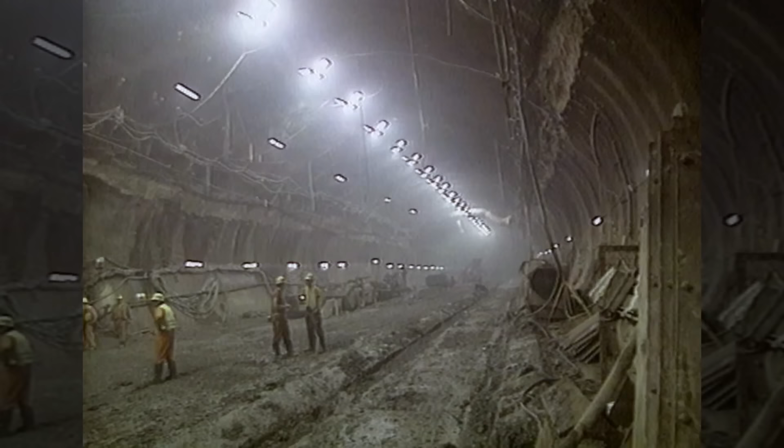Piercing entire mountains, digging a tunnel under the sea, feats of civil engineering which pulverize all records. 3 sites have revolutionized working underground. Like at the Mont-Cenis in the 19th century. Driving a tunnel right through a mountain massif whose rock is incredibly hard. It's never been done before, yet it's made possible by a brand new invention.

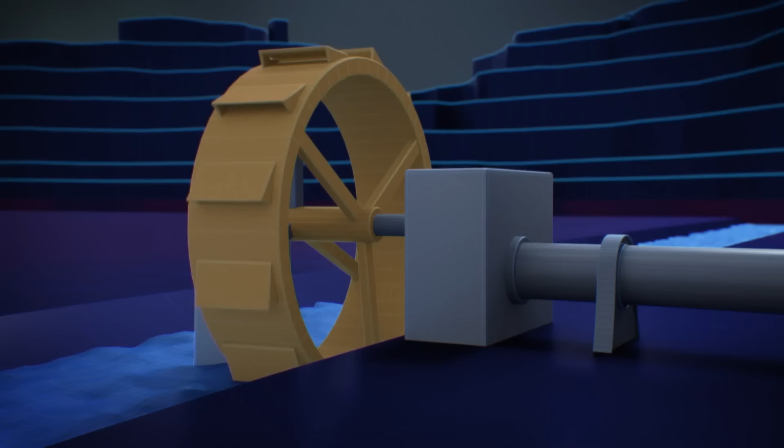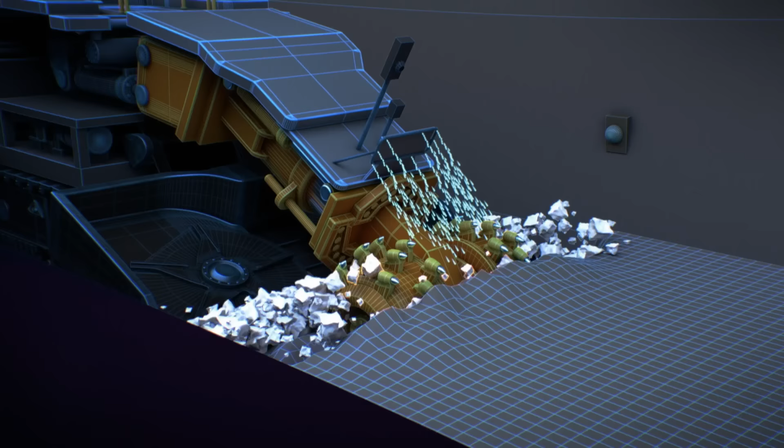An air-compressed drill, a kind of descendant of the pick hammer. Its performance is a quantum leap in drilling. However, 140 years on, the tunnel has to be enlarged, an altogether new challenge for the engineers. How can they keep the walls from collapsing? The answer is a machine that digs with centimeter precision. The laser checks the markers and tells the machine exactly how deep and how wide it has to dig.

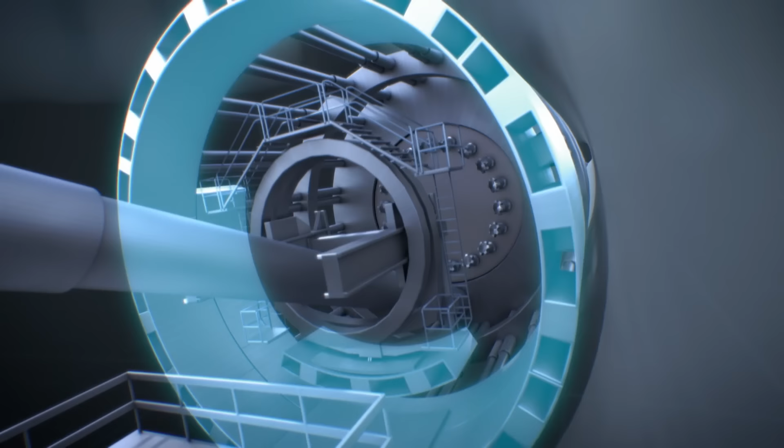Another feat long deemed impossible, a tunnel below the English Channel. It was the site of the century, like when 800 years ago they erected Notre Dame Cathedral. It seemed a huge gamble to dig only 40 meters below the seabed and yet avoid the risk of flooding the site. The solution is stunning. It's not just one tunnel, but 3. The result is a world first, the longest underwater tunnel on Earth.

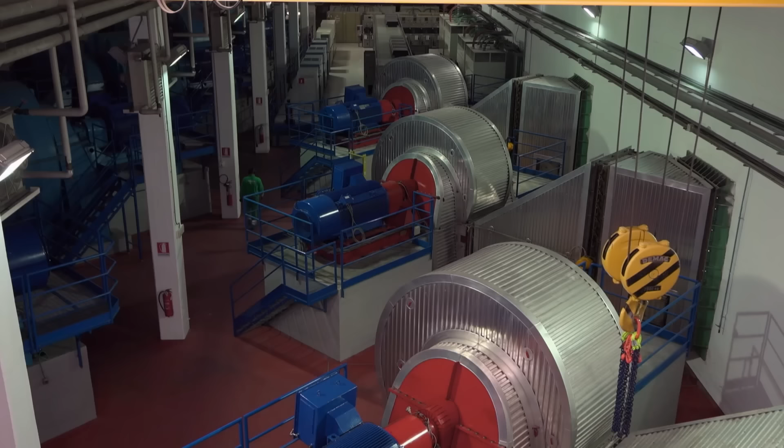A tunnel in the Alps holds another record. In 1965, the Mont Blanc Tunnel opens as the longest road tunnel in history. 50 years on, it also achieves the record of being the technically most advanced of its kind. There are about 4,000 sensors.

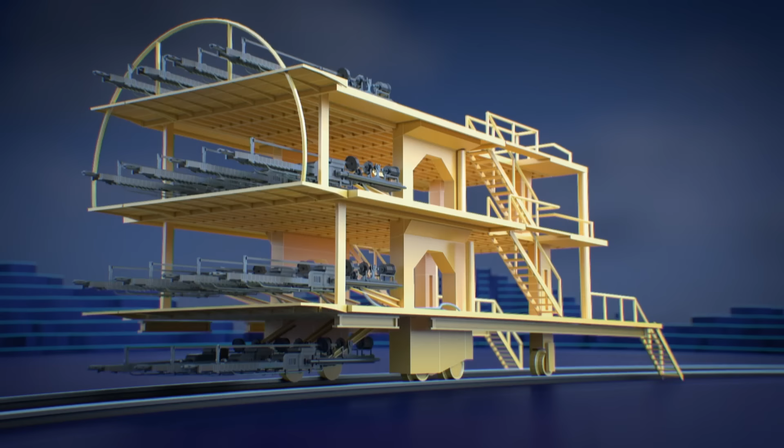How did the engineers rebuild a work more than 50 years old? What kind of machine was needed to replace entire sections of the tunnel? It was a colossal effort, unique in the world. The old slabs were cut out, carried outside, and then the new ones were put in place. 3 examples of high-end engineering with unequaled challenges at the most spectacular sites.

Be it oceans or mountains, we have always strived to overcome the obstacles nature has put in front of us. Tunnels have been among the first great achievements of our ancestors. There are galleries dug by miners 40,000 years BC. Be it Stone Age tunnels or the latest technological feats, there are hundreds of such sites the world over.

However, the most spectacular of all, which has been in the spotlight of the international media and accumulated all sorts of records, is the tunnel under the English Channel. In 1994, for the first time, the British and French meet without having to board a boat or an airplane. The American Society of Civil Engineers classified the Eurotunnel as one of the 7 wonders of the modern world.

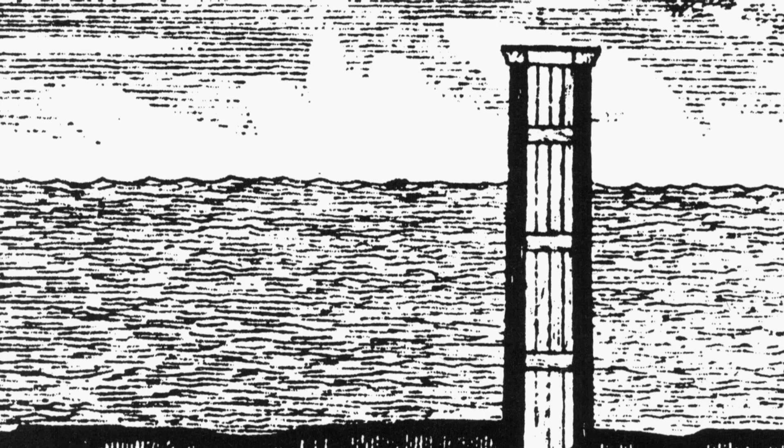To be able to get from shore to shore in 35 minutes was a dream conceived as early as 200 years ago. In 1801, a French engineer, Albert Mathieu Favier, imagines a tunnel with chimneys 80 meters high to allow for fresh air. An unrealistic proposal in view of a maritime zone with potentially tricky weather conditions. It takes until the end of the millennium before the project is considered feasible. In 1981, the governments of France and Britain give it the green light.

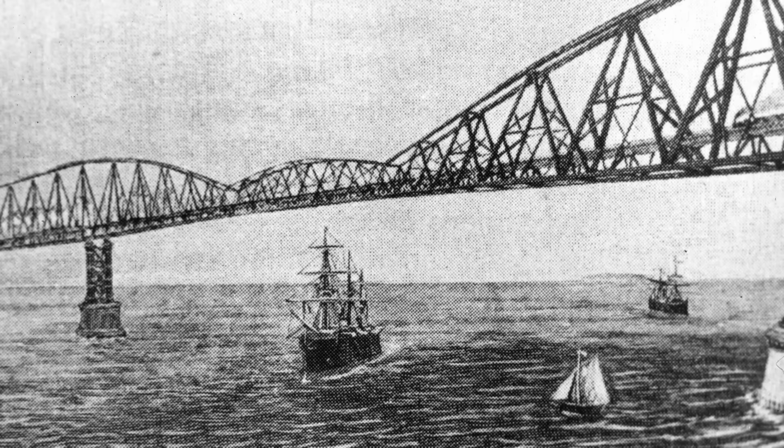4 proposals come under scrutiny. One is a gigantic bridge with hundreds of stays. Another option envisages a combination of tube and bridge. Yet both sides agree on the tunnel, a project of 15 billion euros. Work is to begin on December 15th, 1987.

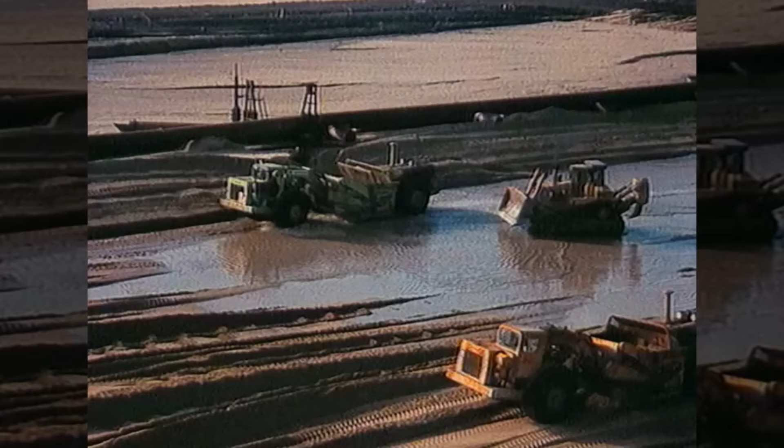Before the construction proper, they did test drills in the seabed to analyze the different geological layers. Samples brought up from several dozen meters indicate that there is a layer of rock at about 50 meters below the bed of the channel. Its characteristics are decisive for digging a tunnel. It's called chalk marl. It formed millions of years ago, when the dinosaurs still walked the earth.

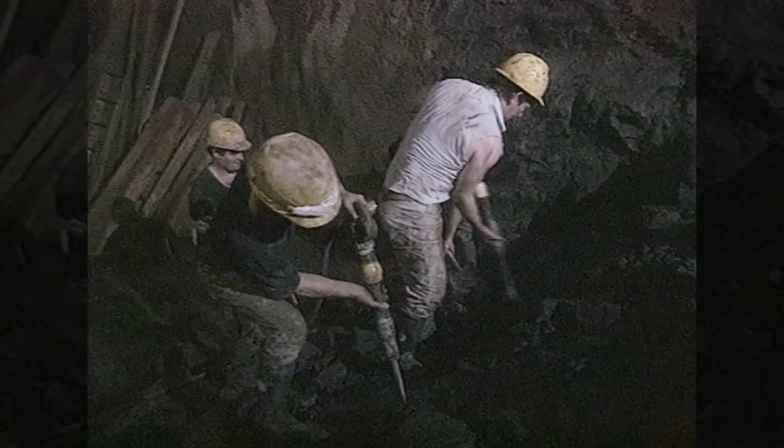It has two peculiarities. It's comparatively easy to dig, and it's impermeable. The trajectory of the tunnel therefore has to follow this layer, as right above it there's grey chalk, which is much less dense. While grey chalk consists of 10% clay, the proportion in chalk marl is 25%, so it's less porous. Yet, there is another danger.

If the miners dig too deep, they'll hit a layer of so-called gault clay. That's to be avoided at all costs. Gault clay is a bit muddy and very soft. If the rotary shield digger were to have sunk into that layer, the whole adventure would have ended right then and there. Thus, keeping exact track is paramount.

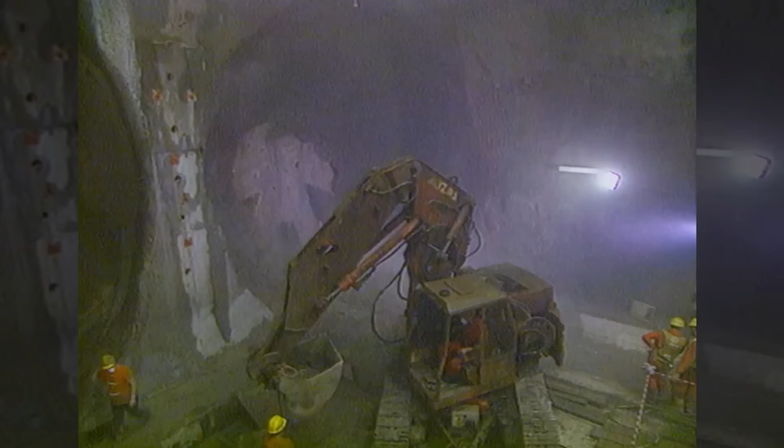The tunnel will run at an average depth of 50 meters under the seabed. If they get too close to the surface, millions of liters of water will rush in within minutes, meaning that the miners will have to follow the oscillations of the chalk marl layer. Digging under this premise poses no specific problem. Yet the ups and downs of the layer mean special trains capable of pulling their weight up long ascents are necessary.

Trains that can tow trailers with 32 trucks in all, or more than 150 cars on every crossing, are envisaged. They'll set a record in the field of transportation. With tonnage on that scale, the engineers have to create new traction engines exclusively for the tunnel. They designed hyperpower locomotives with 6 engines each and planned to have 1 locomotive at each end of a train.

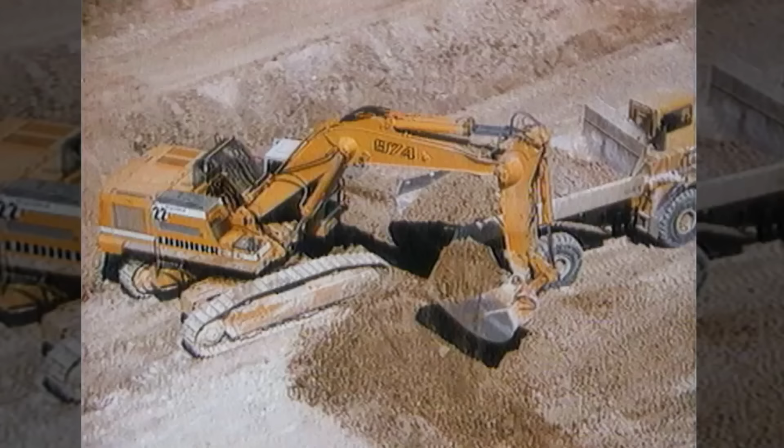Meanwhile, work has begun. Alas, before the actual tunnel can be dug, they must prepare 2 enormous vertical entries for the colossal rotary shield diggers. In Britain at Shakespeare Cliff, in France at Sangatte. Once they're completed, a quite exceptional machine can be loaded into each of them.

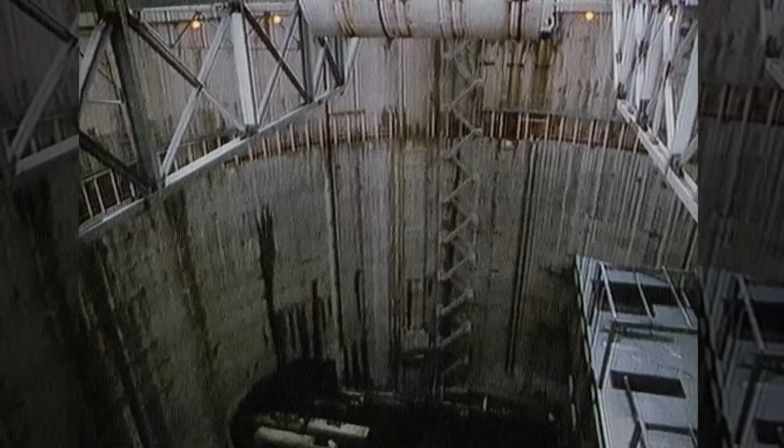The rotary shield digger is an invention that defies normal dimensions. A technological monster, a moving factory. It claws away at the rock, disposes of the debris, and sustains the walls at the same time. It's a Swiss Army knife, 250 meters long, so big that its parts have to be assembled piecemeal down in the pit. Inside the Colossus, there are control positions for engineers and technicians to monitor the monster.

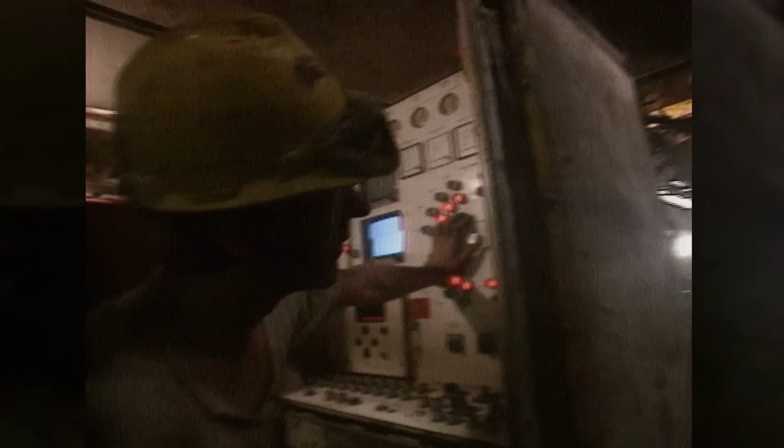The steel giants will dig from both ends of the intended tunnel. Their shields weigh 50 tons each and are armed with 2 rows of teeth, one of tungsten placed on top of the other teeth, which weigh 80 kilograms. Thanks to this ingenious device, the dig will advance at a pace of 3 meters per hour.

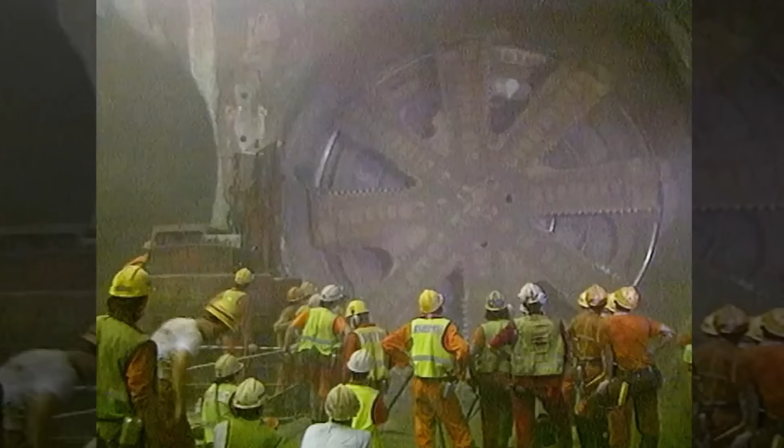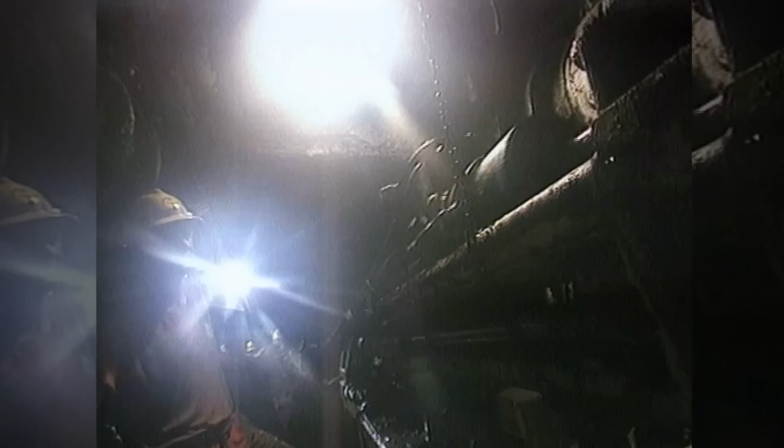However, this performance must be achieved threefold, as there are 3 separate tunnels to be dug. One for the line from France to Britain, one for the reverse direction, and the third for maintenance. So what they need is 3 rotary shields on each side of the tunnel. And as the machines have to be replaced due to wear, there are 11 digger shields in use in the end, a mass of steel and machinery that tops the total weight of the Eiffel Tower, 10,000 tons.

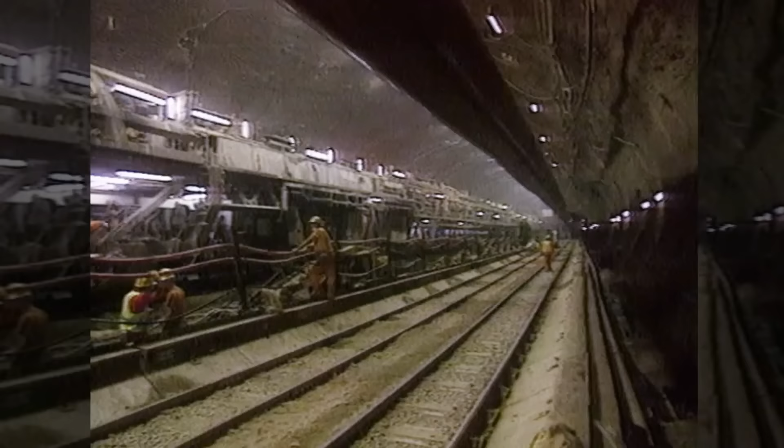Yet they don't just dig. These masterpieces of technology more or less construct the tunnel all by themselves. Relays of wagonettes carry off the ground rock back to the base of the pits, where they're reduced to mush by gigantic centrifuges. There are huge rotating blades, and as chalk crumbles, all you have to do is add water until the whole mass is liquid enough and can be pumped away.

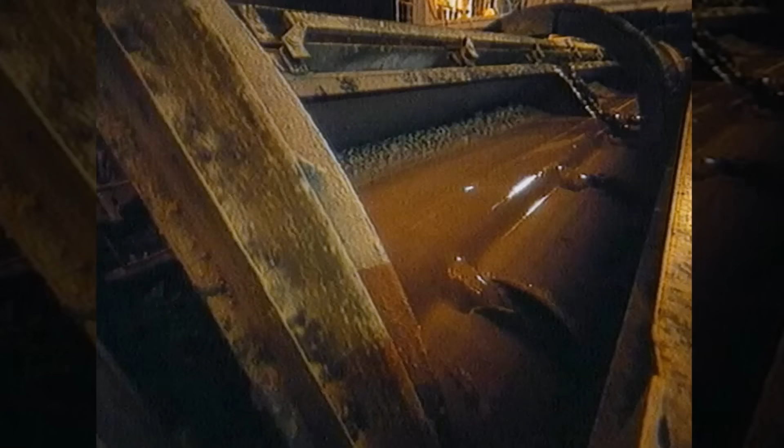Millions of tons of chalk marl are thus disposed of a bit further on outside the pits. It's such an enormous amount of material that on the English side it caused the most peculiar phenomenon. We enlarged Great Britain. We created a stretch of land called Samphire Hoe, which is now a nature reserve for birds, plants, etc. It's all land gained from debris from inside the tunnel. 30 hectares of new land. Samphire Hoe is twice the size of the biggest stadium in France.

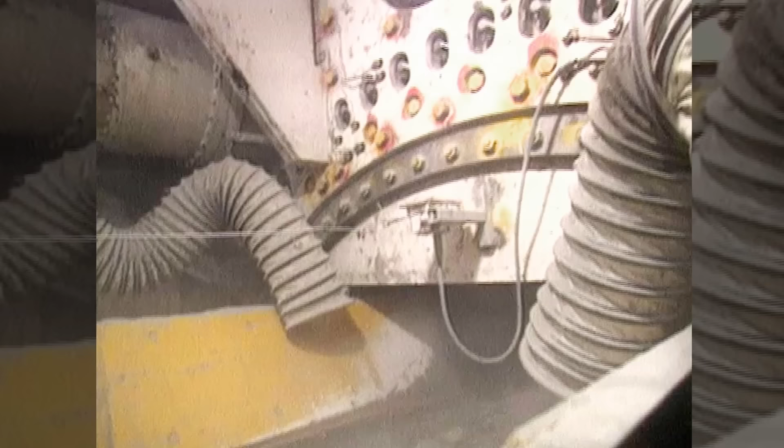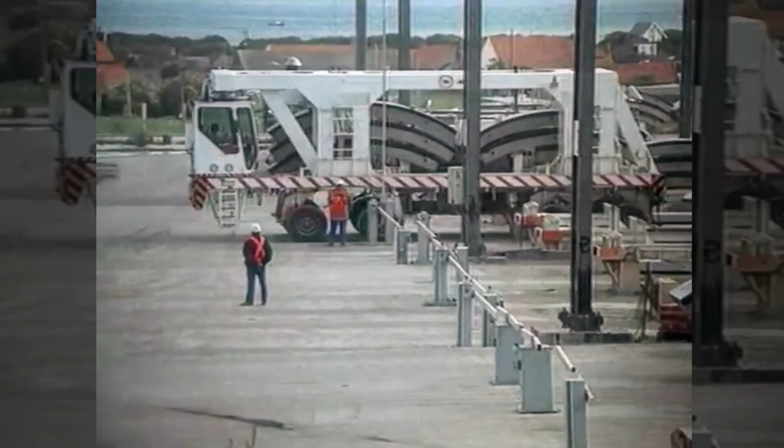The efficient extraction of rocks is one of the great advantages of a rotary digger shield. Yet the moving factories produce another essential element. They provide the installation of voussoirs. They put in place the separate sections which, when welded together, will constitute a watertight tube. 720,000 of them will make up the mantle of the tunnels. On the English, as well as on the French side, several square kilometers are needed to store them before they will be fixed underground.

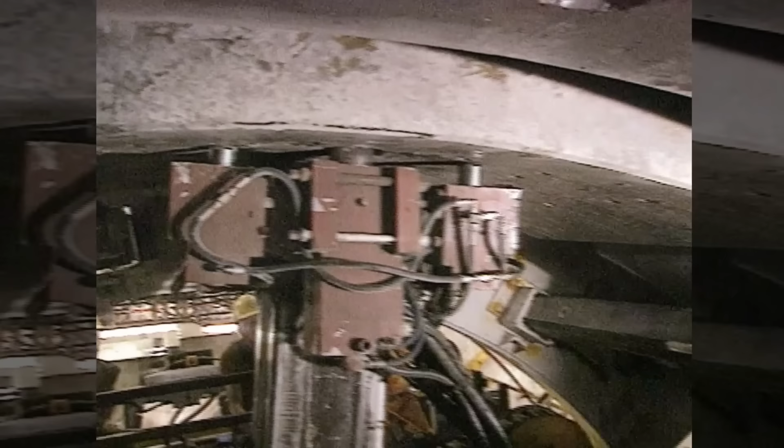However, between the plates and the chalk, there's a gap of between 5 and 7 centimeters. It doesn't sound spectacular, but if water seeps into these cavities, the resulting pressure may endanger the stability of the tube. There were teams whose sole task was to inject concrete into these voids to ensure the tunnel was watertight. This protective mantle has been a major axis of maintenance ever since. Specialist workers continuously plug any fissures that may show up.

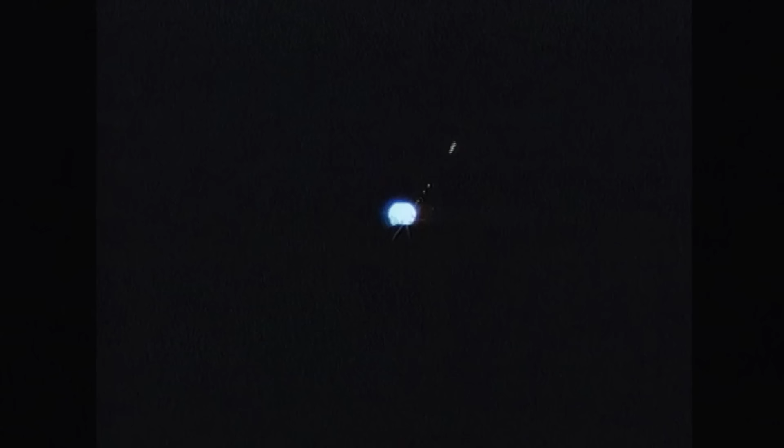With hundreds of trains rumbling through the tunnel, the seeping in of water is what engineers dread most. As many as 400 trains pass every day. In view of hundreds of passengers and thousands of tons of freight, measures to keep the tunnel watertight are indispensable. So when work began, the possibility of a major influx of water caused a good deal of concern. 2 sections of the tunnel demanded particular attention.

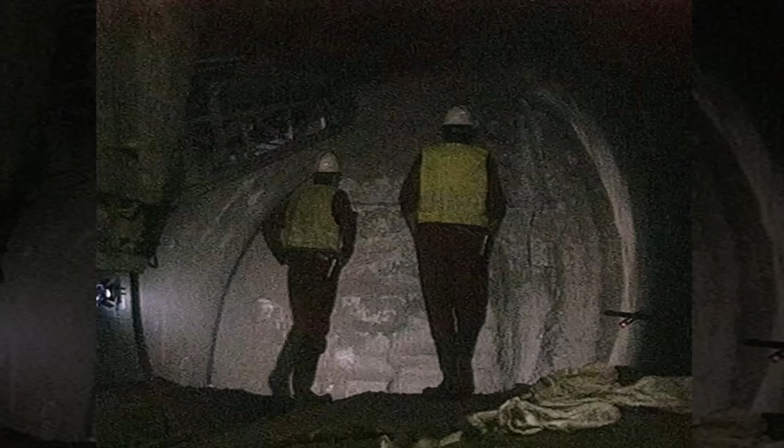The engineers knew quite well that there were faults in the rock at the transitions between sea and land. These were the weak points, one on the British side and one on the French. Thousands of litres of concrete are injected behind the voussoir. Apart from minor splits of 5 centimetres, there are cracks requiring a filling of several cubic metres. As long as the 3 tubes follow the hard and impermeable layer of chalk marl, there's little to no risk of an inundation of the tunnel. But what if there's a rupture in the crust of the earth?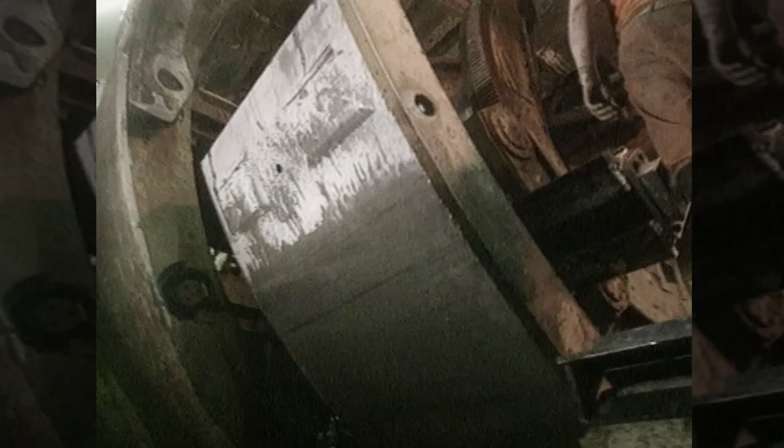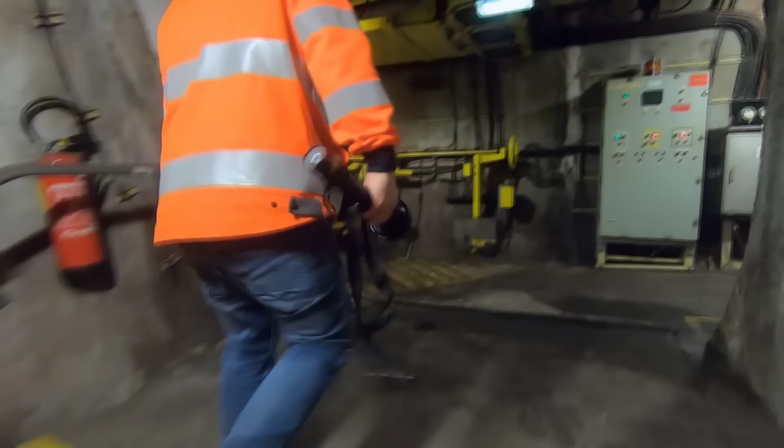Seismic surveillance is taken care of by hundreds of sensors inside the voussoir. But up to now, tremors under the channel have been so small as to be practically undetectable. Yet, if there were a problem inside one of the tubes, engineers have provided for a bypass. In that case, you can pass from one tube into the other, so there'll be no interruption of the traffic in the tunnel as a whole.

The engineers have planned for 2 gigantic crossovers. Tunnels within the tunnel. 8 kilometers from the English entrance and 12 kilometers from the French side, there are these immense cathedrals, the crossovers. There, a train can be rerouted from its tube and enter the second tunnel, a rail crossing under a monumental vault. It's nothing unusual overground, yet constructing one under the seabed is a challenge.

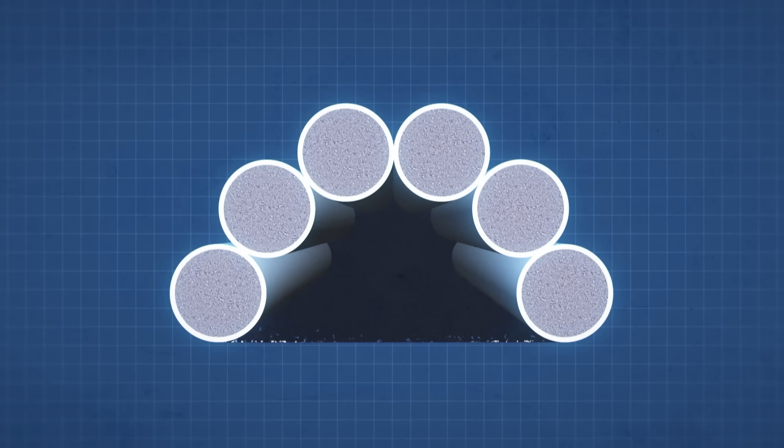A French engineer, Jacques Fermant, comes up with a solution. He proposes building an enormous hull to regroup the two tunnels. It's never been done before. 6 tubes of 200 meters are dug, then filled with concrete to solidify them. Together, they'll form a half circle. It's made up of superimposed mini-tunnels. Once the hull is completed, you just have to dig the cave underneath to link the tubes. It was another historical first.

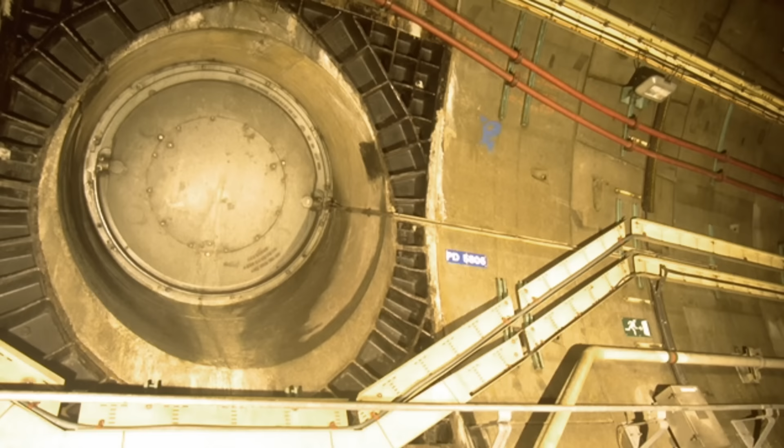Yet the crossovers aren't the only links between the rail tunnels. There are other tubes needed for maximum exploitation. Every 250 meters, there are so-called piston relief ducts, which link the rail tunnels. They serve to evacuate the air, which builds up in front of an oncoming train. You're inside a tube of 7.6 meters in diameter, so if a train comes at 150 kilometers per hour, there's an enormous compression of air. This air is pressed into the other tunnel via the ducts. Otherwise, the train's speed would be greatly reduced.

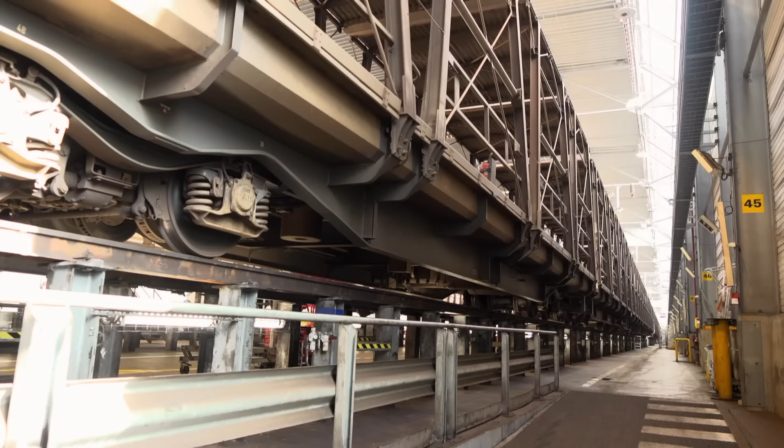And speed is key to the entire project. Trains have to run at 150 kilometers per hour to achieve a frequency of 400 trains per day, which adds up to 26 million tons of freight each year. It's yet another world record. However, to ensure that, constant maintenance is paramount. The wagons carrying trucks and cars are supersize, and as each train is 800 meters long, supervising their sensitive points requires a building of adequate proportions. At 870 meters, it's the largest maintenance site ever. The tunnel trains are inspected twice as often as those on conventional railroad nets. Maintenance and security are the top priorities for travel under the sea.

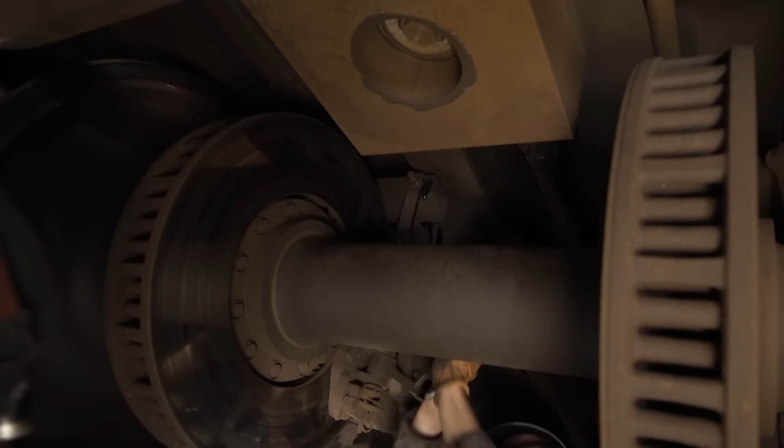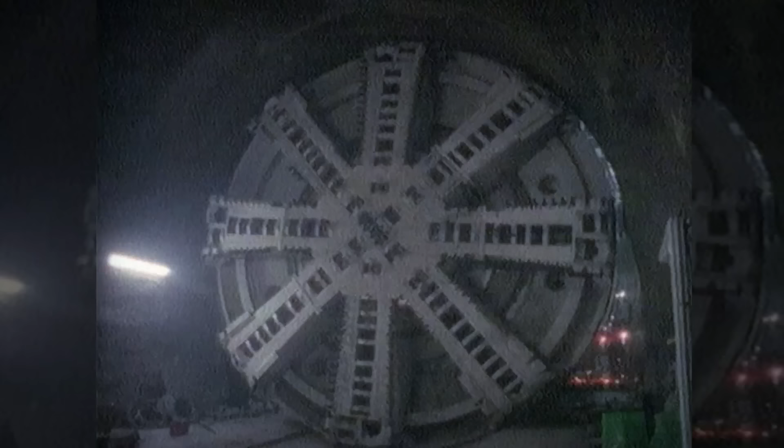After 6 years, work nears completion in December 1990. The two teams are a mere 100 meters apart from each other. The French rotary shield digger is stopped. Its hundreds of parts are dismantled and taken out of the tunnel. The British have opted for another solution. Their Colossus takes a turn to the right and is immobilized for all time.

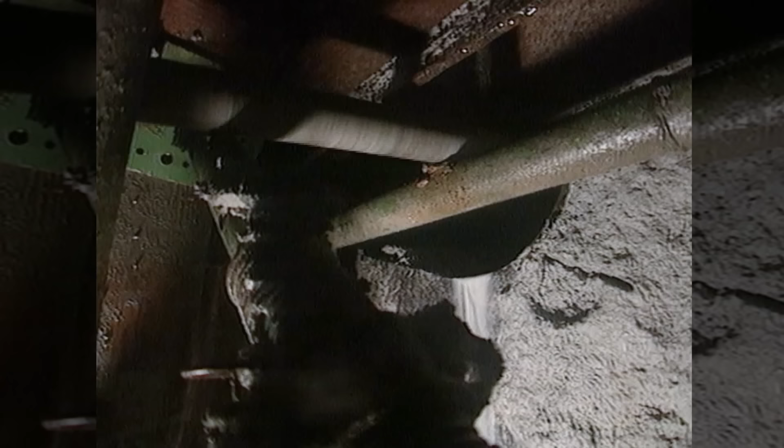Yet one last question remains. Are the digs from each side in line? And what if a digger shield has proceeded too high? In the 1990s, GPS can't help. At this depth, no satellite signal is strong enough. So the British engineers send forth a probe. A telescopic pole bores its way through the rock. Finally, after several dozen meters, there's the breakthrough. They've met the French tunnel spot on. We were right there, a mere 40 centimeters to the side.

On December 1st, 1990, at 12 minutes past noon, Philippe Cozette shakes hands with his British counterpart, Graham Fagg. The images are flashed around the world. The longest undersea tunnel in history is completed. Today, its users are 85% British. The Eurotunnel is a physical link between France and Britain. Its construction has become a benchmark in engineering. Yet, there was a precursor, which 150 years before, forever changed the technology of tunnel building.

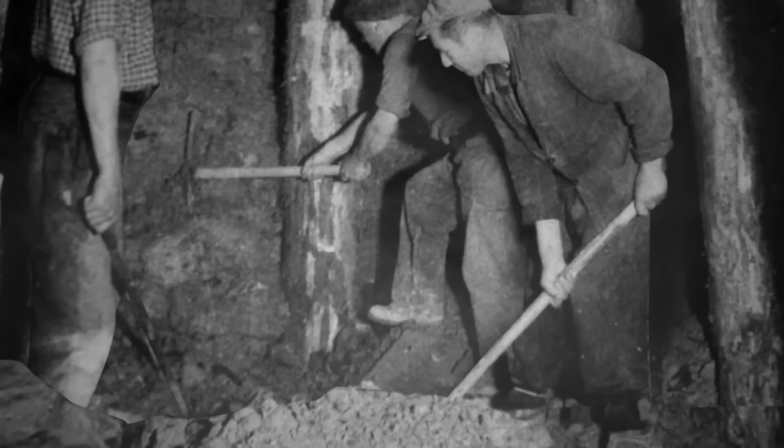The tunnel of Mont-Cenis in the Alps retains a special place in history. In the 19th century, it seems a huge gamble. How do you pierce a mountain massif over 13 kilometers, 6 times the length of the Champs-Élysées Avenue in Paris? A tunnel traversing the Alps to link France with Italy. It's a breathtaking proposal. The obstacles are literally towering. Yet the commercial rewards promise to be staggering.

As for a site, the powers that be opt for the Maurienne Valley. It's one of the Alpine valleys which link the city of Lyon with the industrial north of Italy, Milan, Turin and so on. The best option for trade via a tunnel is transporting goods by train. First, however, some political peculiarities have to be taken into account.

When work begins in 1857, the Duchy of Savoy in the Western Alps is still a possession of the Kingdom of Sardinia, one of the many states which soon will constitute the future Italy. That means work began on a territory that was 100% under Italian control, and only after Savoy was ceded to France in 1860 can we speak of a proper French part. It's unique to have a project which starts in one country and ends up in 2 with different nationalities.

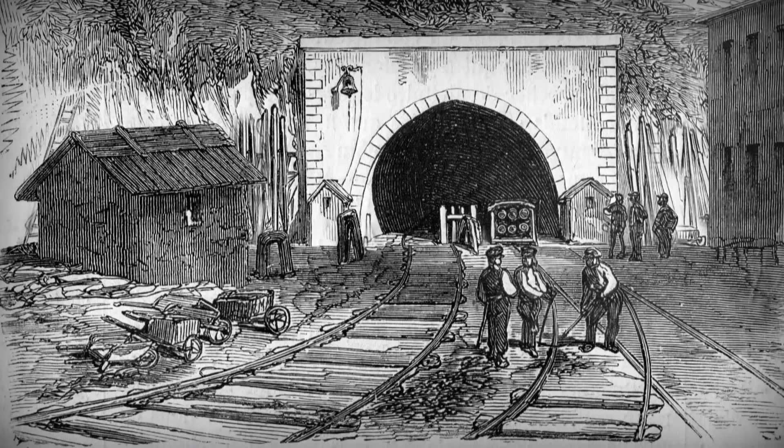A political tangle which isn't conducive to speeding up work. It takes the miners more than 15 years. Not least because they have to dig by hand. They managed 40 centimeters a day, which is extremely slow. The slow advance also results from a total lack of knowledge about the kind of rock the miners encounter. Soft, hard, porous. Conditions vary constantly.

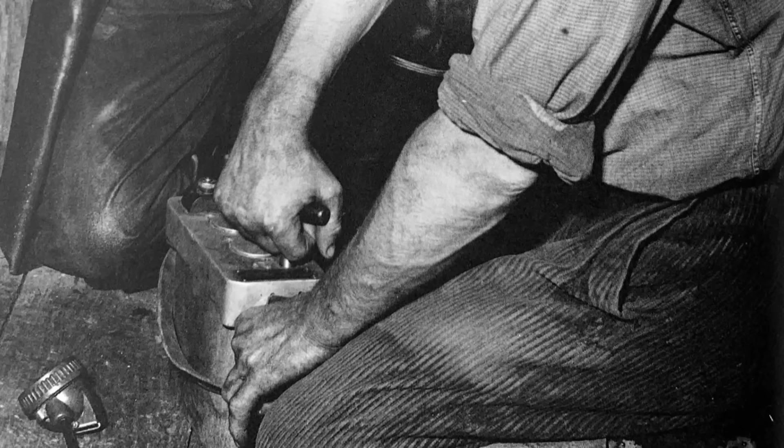Today, before work even begins on a tunnel, geologists reconnoiter the environment by using probes. You dig a small pre-gallery to see what you will encounter. Back then, there was surprise at almost every layer. If the rock proves too hard, there's only one way of advancing: to blow it up.

Yet, resorting to gunpowder is fraught with danger. At the time, the workers still had a lot to learn. It's a most risky job. They faced all sorts of imponderables. There were dozens of fatal accidents. The use of gunpowder causes rockfalls which slow down the work. The natural vault has a tendency to subside or to collapse altogether.

Digging proceeds at an agonizing pace. Contemporary specialists estimate that it will take at least 30 years to finish the tunnel. Exasperated, British merchants who are eager to transport their goods overland to northern Italy hit on an astounding idea. They proposed building a railroad across Mont-Cenis at 2,000 meters above sea level.

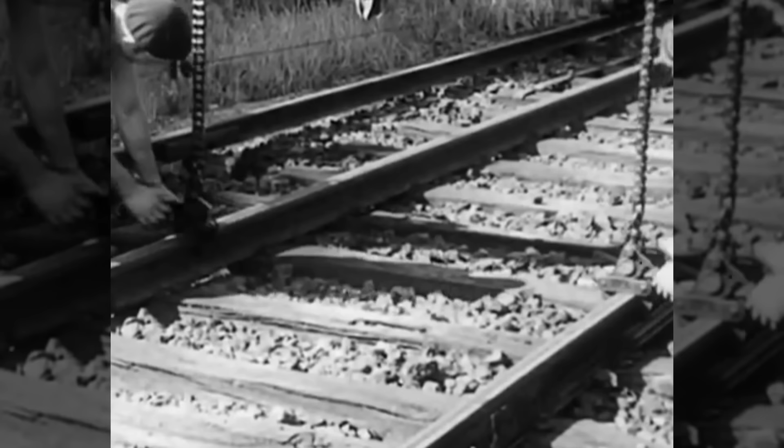While the tunnel is still under construction, the Mont-Cenis Railway Company intends to operate a regular train. Alas, the long-winded ascent is often blocked by snow or avalanches of loose rock, which reduce speed to a mere crawl. The venture costs investors several £1 million. In the end, it's a financial disaster. This is also largely down to a technological revolution.

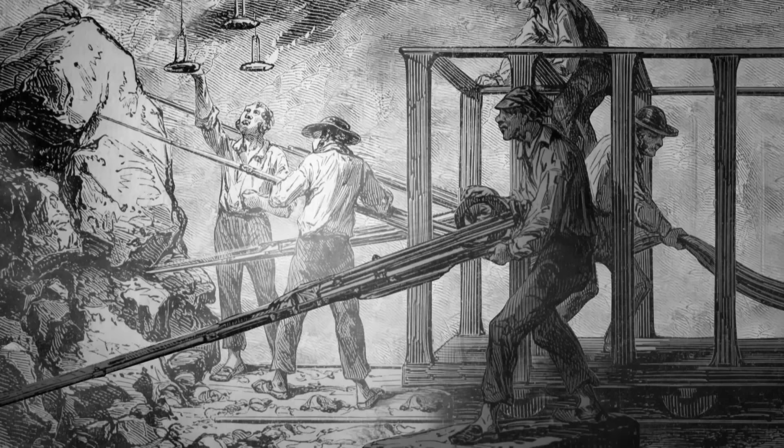A local engineer, Germain Sommeiller, has invented a device which will prove a watershed in tunneling. The ingenious new tool is based on using compressed air to drive a drill. It will transform work underground for decades. A 19th century drill resembles a harpoon. It's 3 to 4 meters long and pierces the rock.

To accelerate work, which, as some said, would never end, Sommeiller provides drills with a percussive power previously unheard of. And what's more, he procures the required energy directly from the environment of the tunnel, from its abundance of water. A wheel driven by streams deviated from the mountain pumps air into watertight pipes. Thanks to a flap valve which closes automatically, the air is compressed and stocked in huge cylinders.

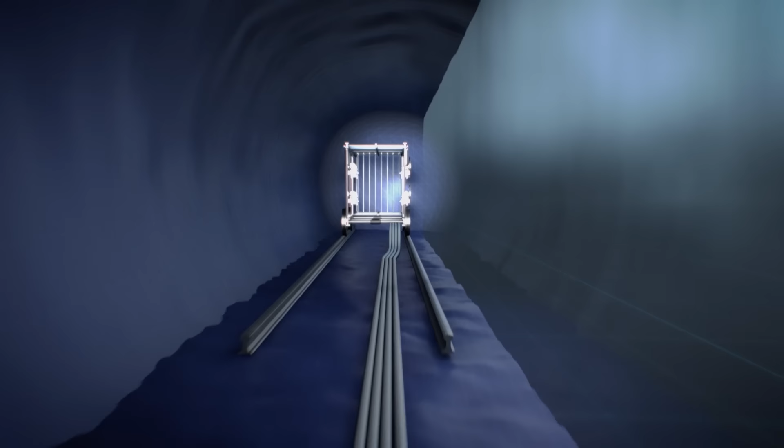Thus, the air can be sent to the drills by a system of conduits. When the valves are opened, the air shoots through the pipes into the interior of the tunnel, where its power is liberated and feeds up to 4 drills at the same time. With a pulse of 50 beats per minute, the machine is capable of drilling holes several dozen centimeters deep.

The miners then ram in their explosives. Thus, the detonation will take place deep inside the rock, instead of at the face of it. A much more efficient way of blowing up things. Sommeiller's machine allows several meters to be advanced each day. The new technology pulverizes all existing records in digging.

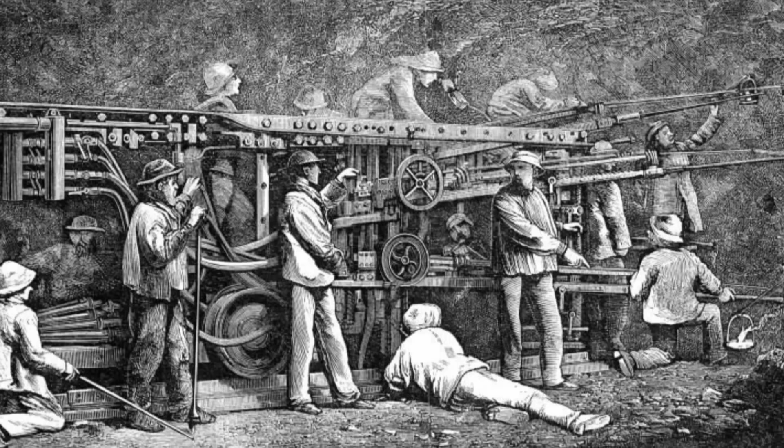Yet the new method comes at a price. The multitude of explosions cost the lives of more than 50 workers. At sites like this, back then, safety was non-existent. Working conditions are aggravated by clouds of dust, which are blown back into the tunnel after each explosion. The dust penetrates into the lungs and blinds the workers. No one can stand this for long.

Germain Sommeiller must adapt his machine, and he does, with another brilliant solution. He used the compressed air to drive ventilators in order to ameliorate the air in the tunnel. The engineer also inserts small openings in the machine itself, which allow the air to pass and thus clear the workspace of dust.

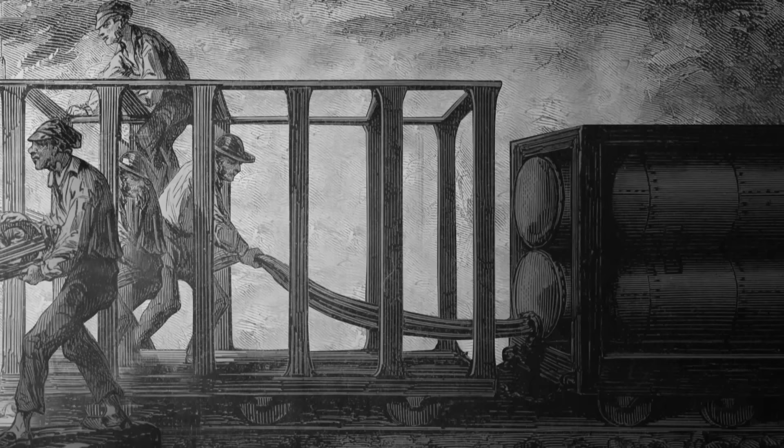Now the miners can continue at a much more stable rhythm. The schedule for the construction of the tunnel is greatly reduced. Sommeiller's invention shortens the allocated time of 30 years by almost half. The tunnel opens in 1870. It's a feat that causes a buzz all over Europe.

Only the contractors of the Mont-Cenis railway company don't join in the jubilations. Their tracks have been made redundant by compressed air. Due to the tunnel, trade between France and Italy surges. The construction will prove a success for more than a century. With the arrival of the new millennium, however, profound modifications are required.

The transit of thousands of heavyweight trucks between France and Italy calls for an alternative solution. Generally speaking, trucks aren't too welcome in the Alpine valleys. Their exhausts pose a major problem. To maintain traffic through the Alps, the powers that be decide to put the trucks or their containers on trains.

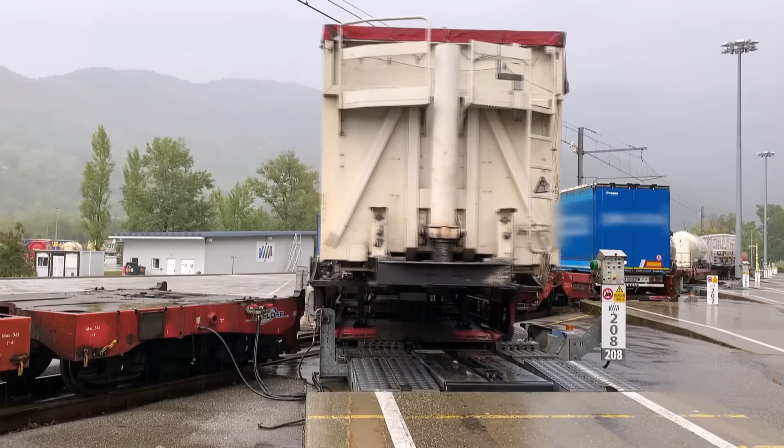A splendid idea, except that the tunnel is too low. Enlarging it is a daunting prospect. To augment the size, you either have to raise the vault, or you must lower the base. Before the oversized trains could safely pass through the tunnel, the present base has to be dismantled and taken out. The option of hacking away at the walls and the ceiling seems problematic. The tunnel may simply collapse.

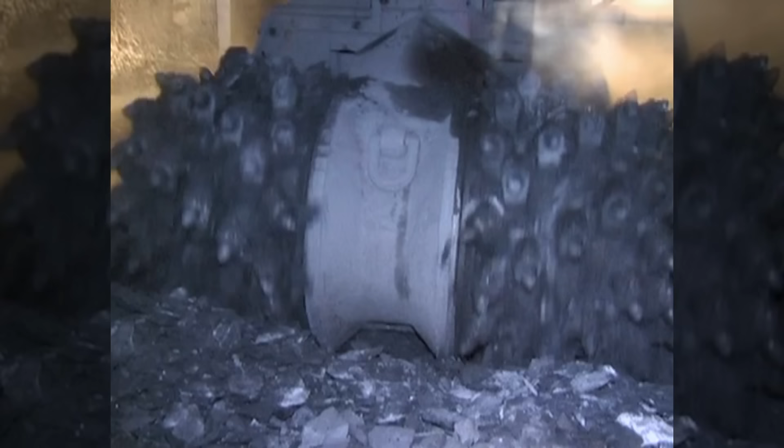However, digging up the floor is easier said than done. How do you lower the base sufficiently and provide a safe bed for the new rails? A machine capable of doing that doesn't exist. Yet. So, they invented one. In 2007, a French company presents an extraordinary tunneler, the D-Rocker. With a weight of 50 tons and a wheel fitted with massive teeth, the D-Rocker is an extremely efficient device. Its forward part bites into the rock and digs up the floor.

Yet, before it can be let loose, the ground has to be prepared. One of the tracks was completely dismantled. The rails, the ballast, the sleepers. Once the way is free, the D-Rocker can go about its job. It's guided by lasers, which keep it on track and also relay data on the soil ahead. It proceeds at a speed of between 40 and 60 meters per day. To keep the wheel from overheating, its teeth are sprayed with water.

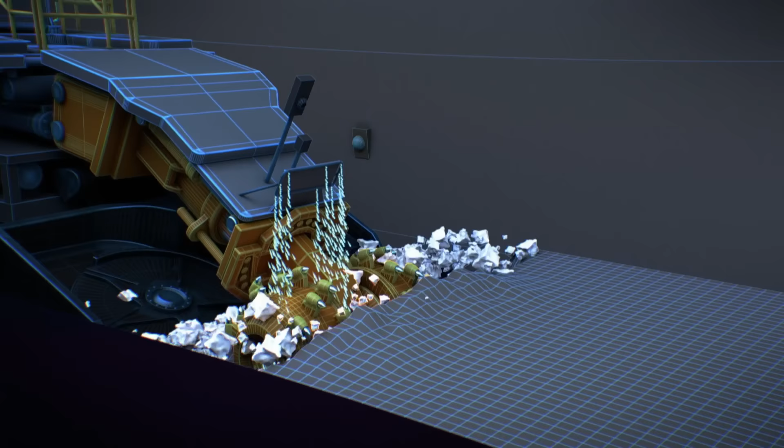The debris is transported to the back of the Goliath. The rubble is taken out by a conveyor belt. Thousands of cubic meters of materials are thus evacuated, and the apron is lowered by 70 centimeters over the entire 13.6 kilometers of the tunnel. In 2011, the first trucks roll onto the platforms, enabling the transport of their cargo to be continued by rail. Each day, more than 30 trains enter the Mont-Cenis tunnel.

Yet, there's one issue left unsolved. The tunnel doesn't comply with modern safety criteria. Safety has become a major concern in the field of transport. A decision is inevitable. The Mont-Cenis tunnel has had its day. It will be replaced by the most modern tunnel ever built. To link Lyon to Turin, a stretch of 57 kilometers will be dug underground. The equivalent of 285 TGV high-speed trains lined up behind each other. It's a tunnel of exceptional length, and it will be right under its predecessor. It passes through the same alpine massif, albeit 800 meters deeper.

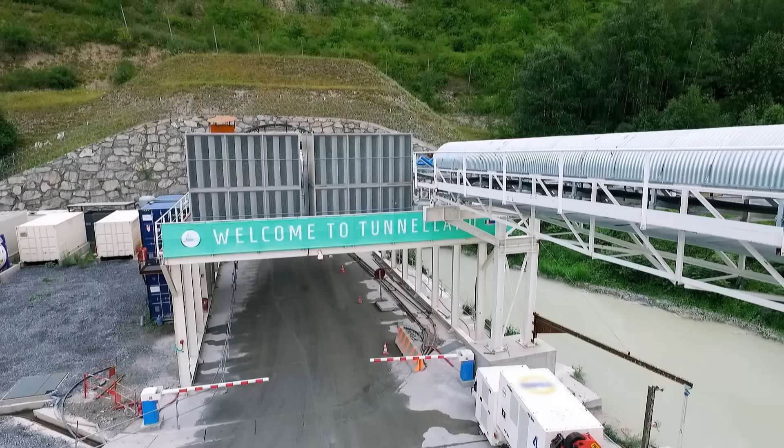The future tunnel is intended for goods and passenger trains. Work begins in 2016. It's supposed to be completed in 2035. It will have everything the tunnel of 1870 lacked, such as ventilation pits to face a worst-case scenario, a fire in the tunnel. They'll serve to keep one of the tubes free of smoke and bring fresh air into the other tube, which can then be used as a refuge for passengers. The pits in themselves require state-of-the-art technology.

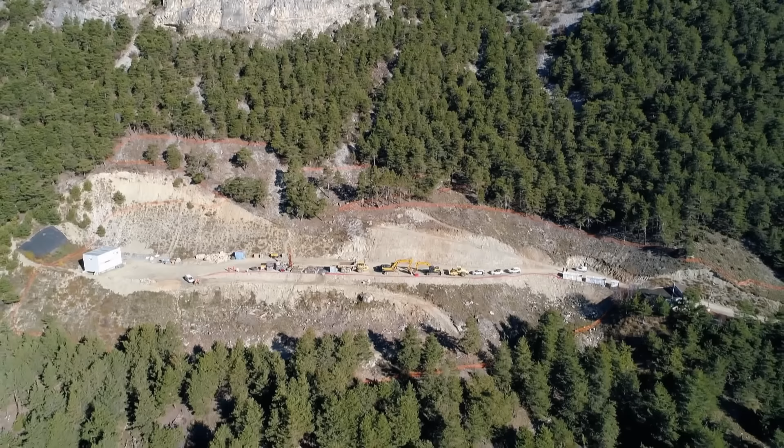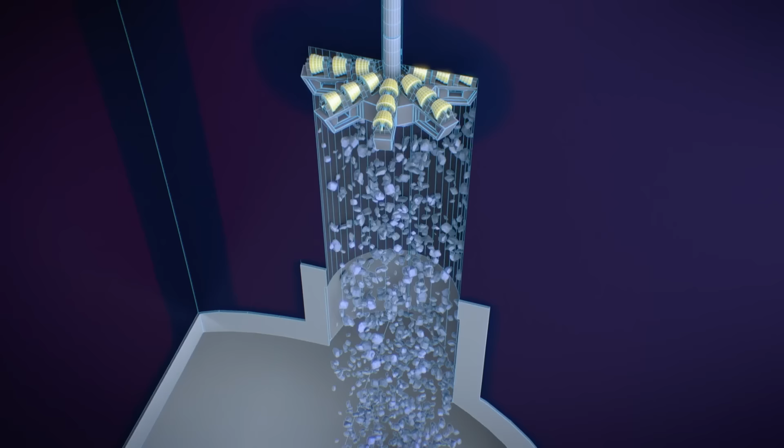First, the teams drill a hole of a few centimeters in diameter from the surface down into the tunnel. A telescopic arm will then rotate a cross-like device fitted with teeth in the cavern below. The cross then grinds its way upwards, while the loose rocks drop down to the bottom. From time to time, drilling must be halted to take out the rubble. For the workers, this is the most critical part. Thus, a diameter of 4.3 meters can be achieved. There'll be 3 more pits close to the first. There aren't many people in the world capable of doing this kind of work.

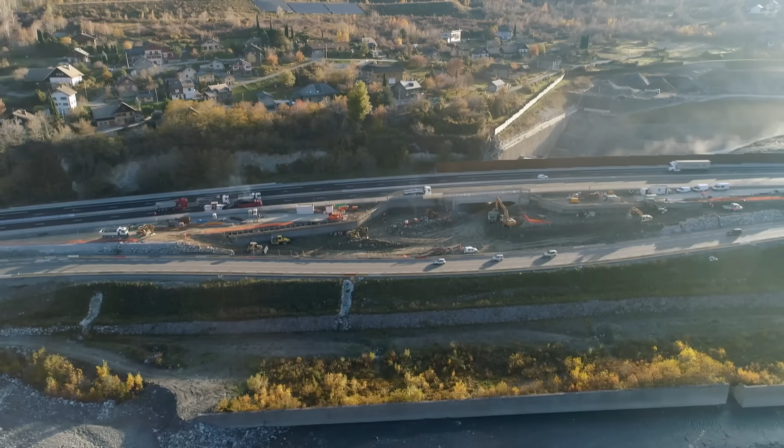The new tunnel will relieve the old subterranean passage, completed in 1870. The Mont-Cenis tunnel will keep pride of place as the first ever traverse right through the Alpine Massif. Yet, not far away, there's another legendary tunnel. The Mont Blanc Tunnel. It proved a completely new challenge for engineers. Since it was intended for exclusive use by cars and trucks, it had to be much larger than a railroad tunnel. Yet would it be possible to pierce a massif with a tube 10 meters high and 8 meters wide?

In the late 1950s, no one could tell. It was a true adventure. We didn't know what we'd encounter once we were inside the mountain. It will be a project to beat all records. The longest road tunnel in the world. An amount of explosives never used before.

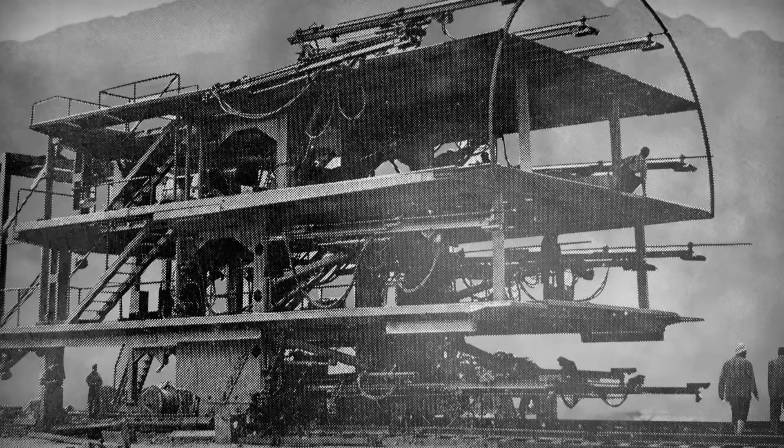With newly developed drills to achieve the envisaged height and width. In 1959, work begins. The new passage through the Alps reflects the booming economy of the 1960s.

Earlier on, any crossing of the Alps was a veritable expedition, with caravans of horses and creaking carriages. With the Industrial Revolution and the expansion of international relations, however, the Alps became a real problem for the exchange of goods.

Yet before work on the 11-kilometer tunnel can begin, its route has to be fixed. And as there's no GPS back then, it means resorting to triangulation to produce an imaginary straight line with the peaks of the surrounding mountains as reference points. And so, there's only one way, and that's up.

There were mountain guides to help the surveyors. The campaign to get the necessary measurements took several months, not just a few days. And often the weather conditions were anything but favorable. It took guts. At 3,500 meters above sea level, mountaineers and surveyors take great risks to establish the direction of the tunnel. 2 guides lost their lives.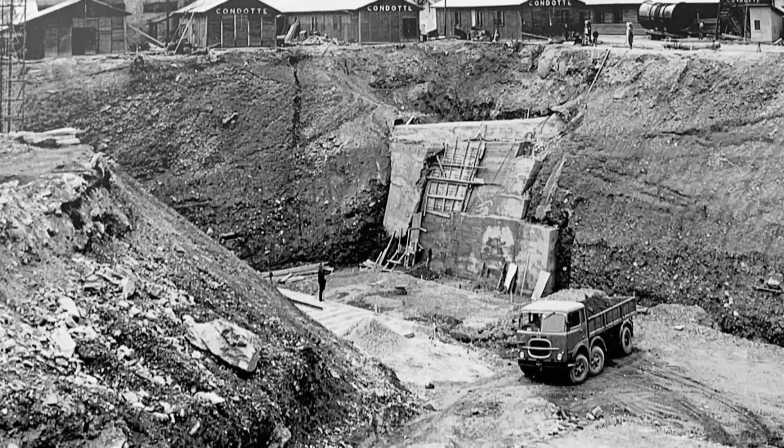To pierce the highest massif in Europe with its granite of extreme density and hardness, French engineers develop a special machine, the Jumbo. An enormous movable scaffold weighing several hundred tons, allowing 25 workers to operate 16 drills at the same time. Their percussive power permits explosives to be placed 4 meters deep inside the rock. You press the button and clear the rubble away.

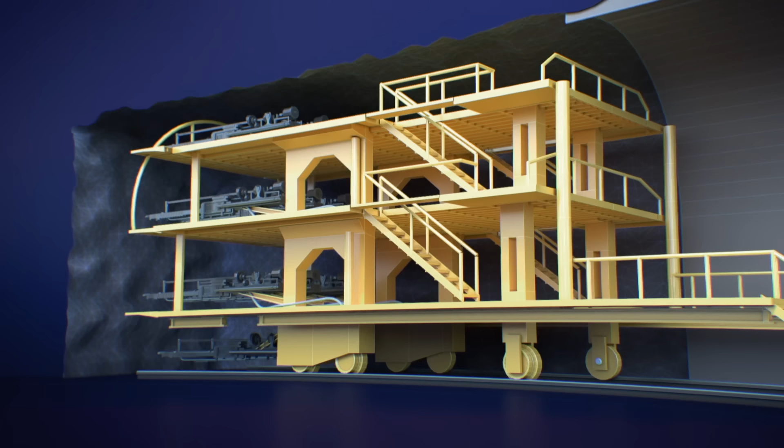Over the next 44 months, the Jumbos on the Italian as well as on the French side drill more than 400,000 holes. 1,200 tons of explosives will be detonated inside them. When digging a tunnel, water is a recurring problem. We're talking of 1,000 liters per second at times. The water comes from a glacier right above. In springtime, the rivulets of melted ice can turn into waterfalls at certain points.

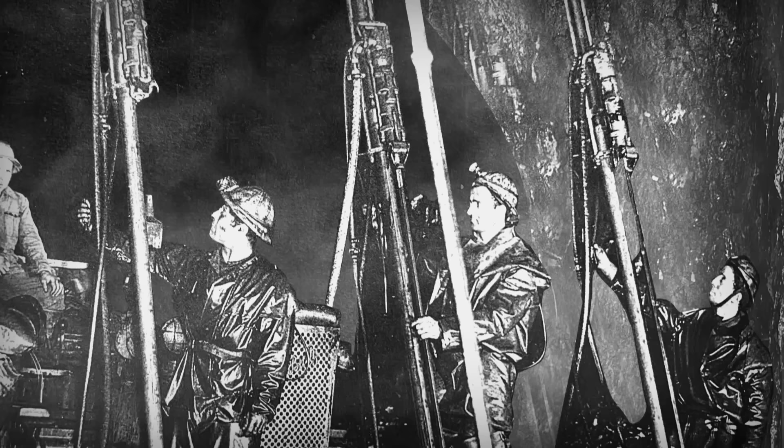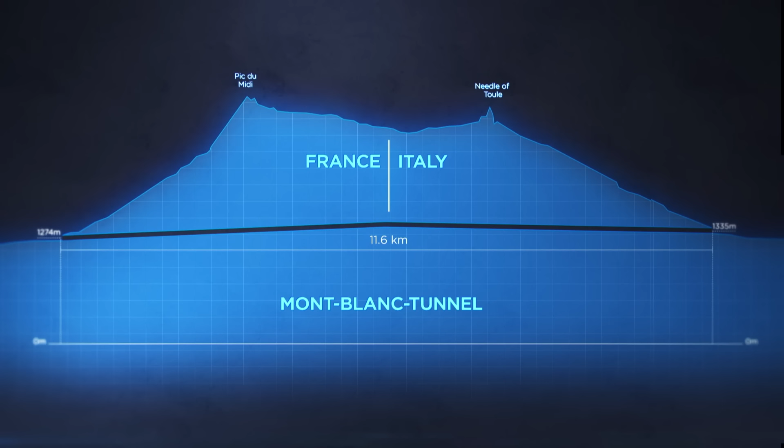Yet, it's a problem the engineers have anticipated. The tunnel isn't truly horizontal. It ascends and descends, causing the water to flow away. Without these slopes, the miners would be engulfed by thousands of cubic meters of water. But the constant humidity undermines the stability of the tunnel walls. To keep them from collapsing on top of the workers, the engineers decide to install voussoirs, sections of concrete which will form a protective tube inside the tunnel.

Yet, with 2 kilometers of rock above, additional precautions are obligatory. They put in a kind of iron roof, steel plates that kept the vault from collapsing. It was a fairly new concept. The vault was literally tacked into the walls. With its 235,000 bolts, this system of consolidating the surrounding rock allows the miners to continue without having to fear a collapse of the vault.

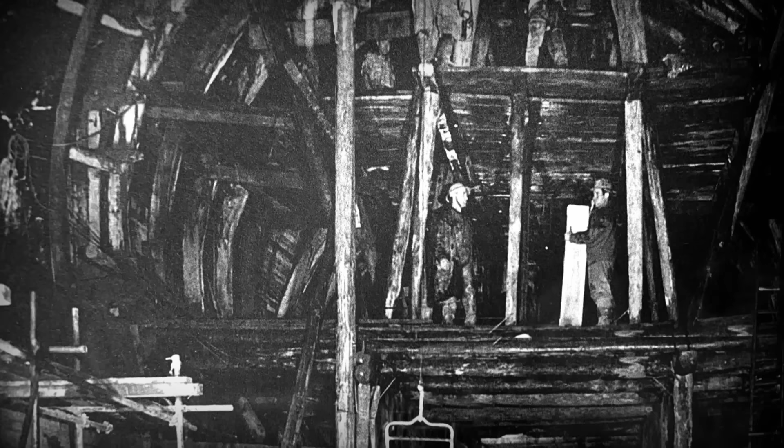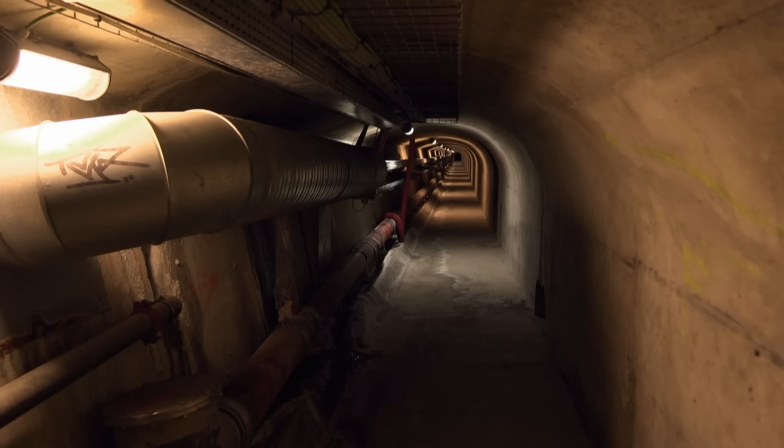Yet the further they advance, the more difficult it becomes to breathe. The problem is solved by conducts, great corridors above the future traffic tube. They will bring in fresh air from the entries. This installation is still in place 50 years on. Today, 5 gigantic ventilators of 2.8 meters in diameter at each end of the tunnel provide for a constant airflow. In 1960, the system is far less sophisticated.

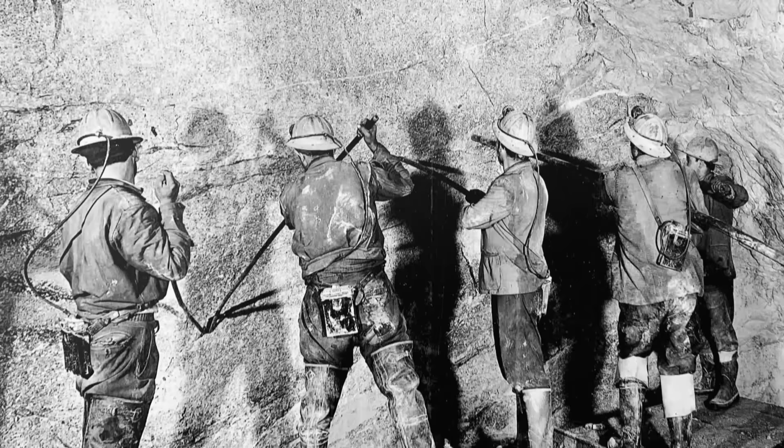However, after 3 years of tunneling, French and Italian miners are only a few meters apart from each other. On August 14, 1962, at 11:31 a.m., they join hands after having blown up the final blocks of granite. The two sections of the tunnel line up almost perfectly. The deviation from the theoretical axis was a mere 13 centimeters. 3 more years are necessary to complete the retaining work, to coat the lanes, and to install a signal system.

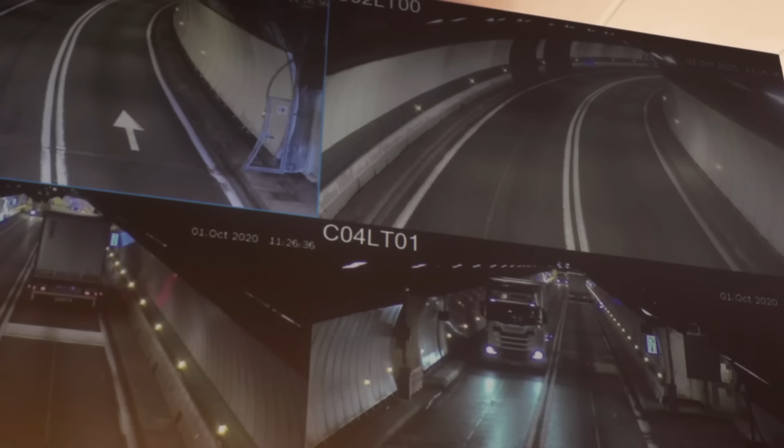On September 15, 1965, the first automobiles enter the tunnel. Each year, hundreds of thousands of cars and trucks pass through the longest tunnel of its time. It's considered an emblematic link between two nations, until one fateful day. March the 24th, 1999. On that day, at 10:47 a.m., a Belgian truck enters the tunnel. Its cargo of margarine catches fire. The driver is forced to stop. The heat amounts to that of a tanker in flames. At 10:54, the alarm is raised.

The toxic fumes spread through the tunnel, claiming 39 lives. The cause is quickly established. The air system back from 1965 is disastrously insufficient. It must be brought up to date. The fire forces engineers to revise the know-how of several decades of tunnel building. The Mont Blanc Tunnel will be closed for 3 years. The French-Italian company running the tunnel embarks on nothing less than a rethink of the entire project. In terms of technology and surveillance, it's an entirely new tunnel.

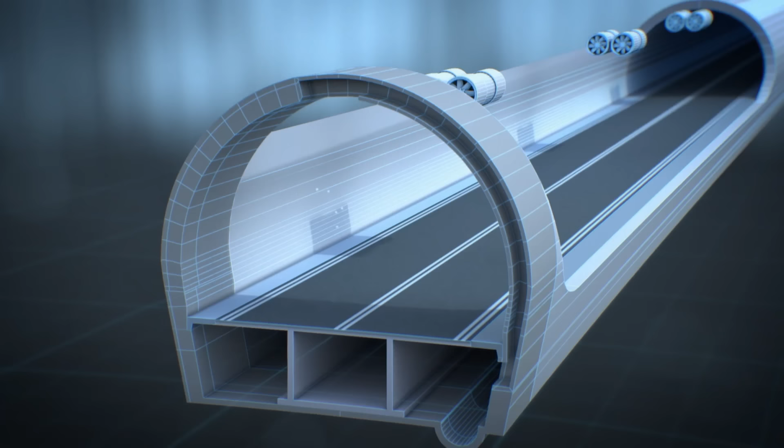Analysis of the fire focuses on the problem of fumes. How can they be extracted as quickly as possible? Irrespective of where they may occur along the 11 kilometers of the tube, the engineers decide to create aspiration points at regular intervals. Thanks to ventilators up in the tunnel, the fumes will be blown towards traps, then sucked into airtight shafts under the lanes, and thus evacuated to the nearest exit.

The algorithms of the system allow the ventilators to be activated in both directions. 4,000 sensors are distributed along the tunnel, providing the control center with thousands of data in real time. One of the most closely monitored of them is the opacity of the air, as this signals the presence of smoke.

There are additional ventilation systems at the entries of the tunnel. Their function is not to counter the consequences of a fire, but to anticipate a climatic feature of the mountains. We have to watch out if there's fog up on one of the peaks. It must be kept from entering the tunnel to guarantee visibility for the drivers.

Apart from the air, the entire construction back from the 1960s is under constant vigilance. To that end, 11 kilometers of optical fiber has been implanted in the road surface. It's ultra-sensitive and registers all movements in the coating. Any deterioration of the cable results in a degradation of the signal. And according to the quality of the signal, we can tell the exact amount of deformation. An interruption of the signal means that the road surface is no longer stable and has to be replaced.

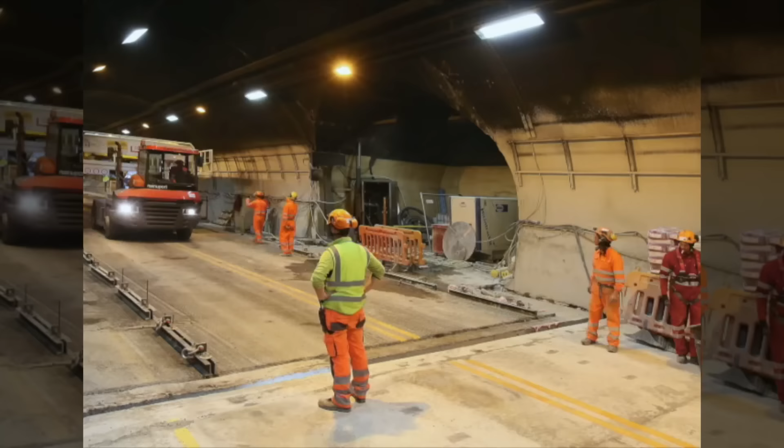Yet, how do you replace entire road sections of several tons each without halting the traffic for days? The engineers have to invent an unprecedented machine. It was a colossal enterprise, unique in the world. We had to extract the old sections, bring them outside the tunnel, and then install the new ones.

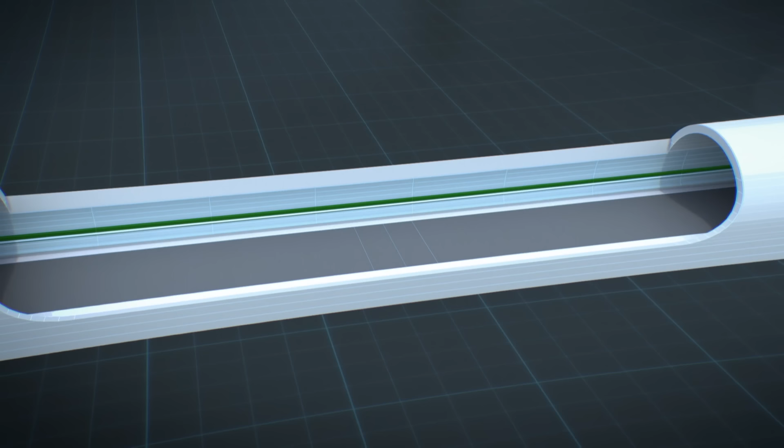At night, on a 600-meter stretch of the tunnel, the coating is lifted from its bed 6 centimeters deep in the floor. Then the sidewalks and the great plates covering the walls have to be taken out. The special machine lifts a 6-meter plate of 2 tons, then pivots it, puts it on a trailer, which then exits the tunnel. Turning the plate is the most critical part. It mustn't break or hit the walls.

The machine then receives a new road section and lowers it into the gap. It's a process which gains worldwide acclaim, especially since traffic in the tunnel can go on without interruption. On average, we have 1,600 heavy vehicles per day. The frequency could even be increased, but for safety reasons, circulation is limited.

We don't allow a random flow of traffic. We have a system that sets the cadence at 1 vehicle every 8 seconds. That's the time a car needs to cover 150 meters at 70 kilometers per hour. Thus, safety distances are ensured.

To dissuade those who like to step on it and don't respect the 12 minutes allocated for one traverse, there are 6 radars within the tunnel. They also calculate the average speed of each car. Those who exceed the speed limit will face the policemen stationed at each end of the tunnel.

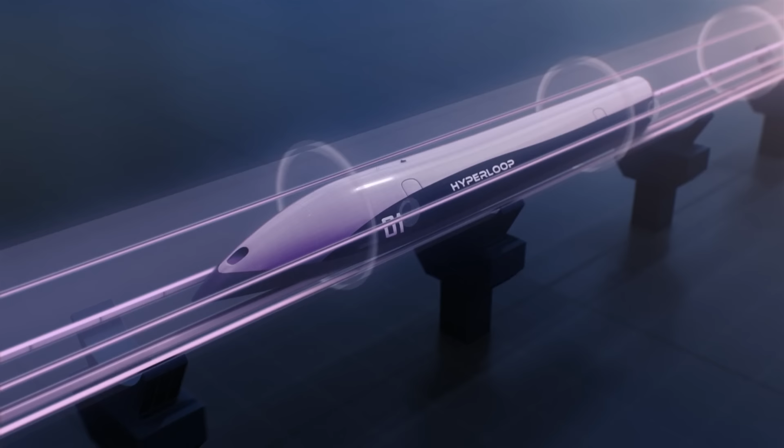The inventions serving the Mont Blanc Tunnel are scrutinized the world over. Just like the latest brainchild of Elon Musk, a rail tunnel with a vacuum inside and without oxygenation, with an air cushion to avoid all friction for the train. Freed of all resistance, it's intended to run at 1,000 kilometers per hour. In France, a test range of 300 meters has already been built to evaluate similar projects. Technological evolution still seems to have a lot in store for us.

If these projects will once see the light of day and change our daily lives, it's because their precursors have paved the way by incredible exploits. Such as piercing the Alps for the first time, inventing machines never seen before, digging the tunnel of Mont-Cenis, linking France and Great Britain by establishing the record for the longest undersea tunnel. The Eurotunnel has been a success ever since.

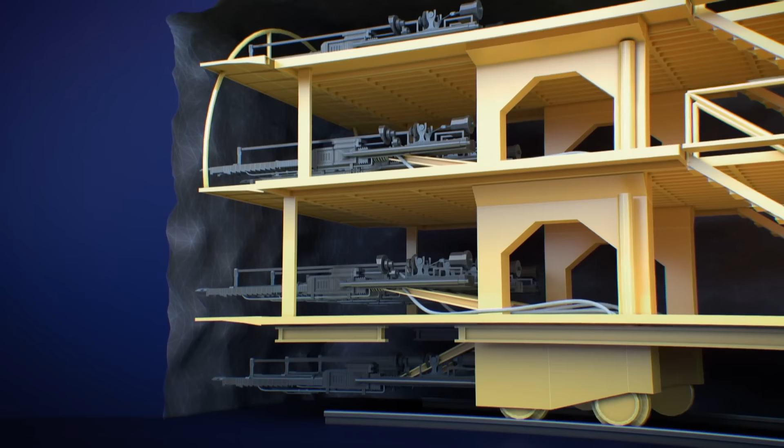Digging the longest road tunnel in history through the highest mountains in Europe. The Mont Blanc Tunnel has become a reference work of its kind. All these ventures are witness to the ingenuity of civil engineers and their willingness to overcome any obstacle. Tunnels will continue to serve as links between people and as spearheads of innovation.